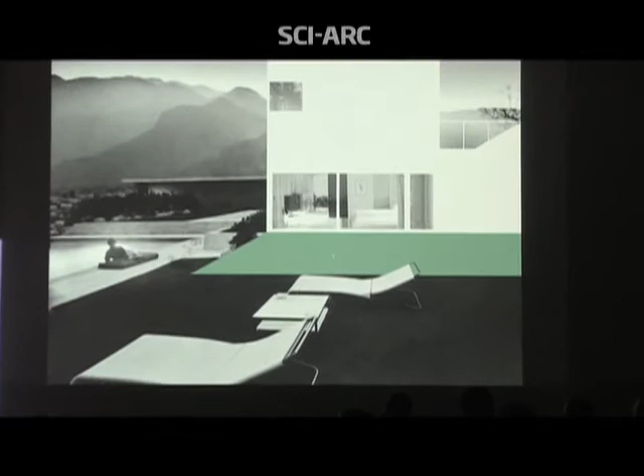One of the shared beliefs in our office is that architecture does boundaries best. Ten years ago, we were still at a moment where we believed in breaking boundaries. But the more we indulge ourselves in the discipline, we realize that architecture does limitations best. They do boundaries the best.

As a result, our projects could be seen as a collection that defines boundaries, composed of a series of objects. Not necessarily aloof, closed, or autonomous objects, but objects that eventually contribute to a city. In our mind, Los Angeles is very much a city of objects.

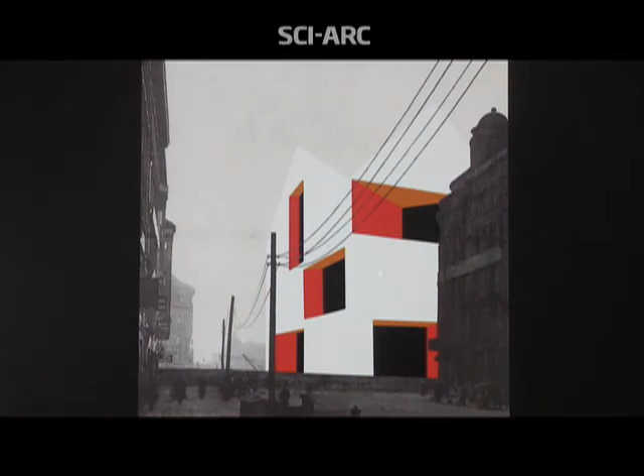So tonight we're going to talk about a collection of work, really as a city of objects, as Mark said. I think what unifies all of these projects of very diverse scales is a sense that in each one of these buildings there's always a sense of the multiple, or one thing on the verge of becoming something else. Whether it's an interior volume nested within something massive on the exterior, or where one building multiplies to become a double and the space between them is an active space of investigation for us, to the idea of the multiple where self-similar sized objects begin to multiply and approximate something altogether different in scale and function.

Finally, some of the larger scale projects we're working on today almost begin to approximate an urban scale and produce a kind of aura that is both diverse and, in that sense, urban, but also still maintains a sense of oneness and collective coherence. So tonight the lecture will be organized according to the following categories: singular objects, doubles, multiples, and what we're calling a new singularity, the larger scale, more urban projects.

So we will start off with these singular objects. I think for us, singular objects are objects that stand alone, but they straddle the line between being complex and being simplistic. They straddle the line of being an observer as well as being a participant.

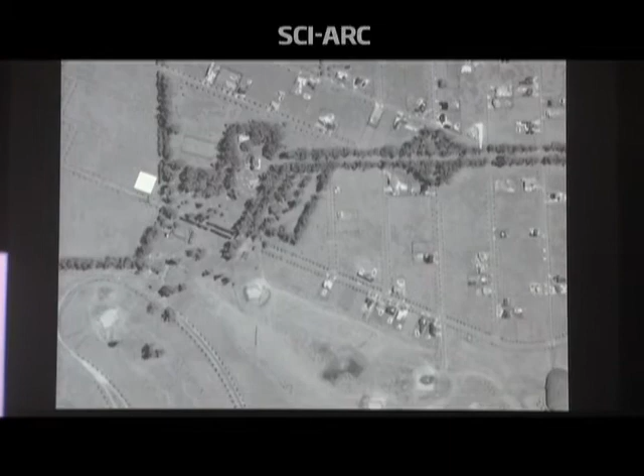The first project we'd like to show you is in the town of Rosario in Argentina, about 3 hours north of Buenos Aires, situated at the edge of a development. When we designed the project, there were really no buildings around, but we knew that in the future, 2 of the 4 sides would be occupied with buildings. So when we planned the building, we preemptively thought about where the future buildings would be, and began to figure out the circulation and the apertures of the building that would look through to where those future buildings would be.

So the house is organized around a spiral circulation, and every time one turns, one is exposed to a different frame of the landscape. It's the first time we built outside of the US, so we basically used a very simple geometry, a primitive that is a marriage between a rectangle and an ellipse.

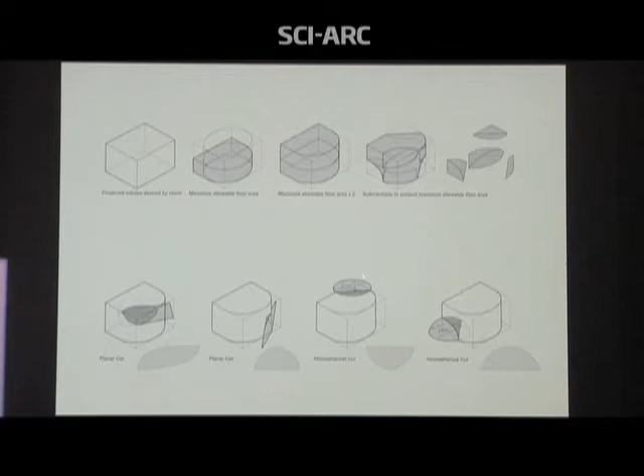Then we deploy 4 cuts for the desire to be an object sitting in the corner. 2 of the cuts are straight cuts on singular curved surfaces, and 2 of them are fragments of spheres. Our logic is that if they could build the concrete formwork of a sphere, they could easily build a fragment of a sphere. So these cuts are positioned at opposite edges of the volume, opposite corners of the volume, and they have a contingent relationship with the apertures. So the openings are really always next to one of these cuts.

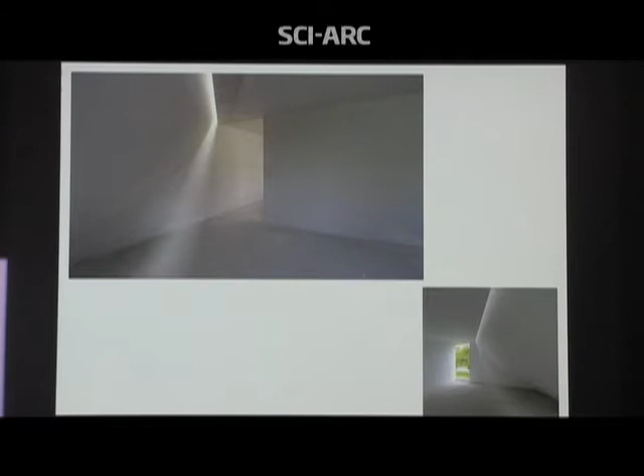And then there's secondary openings that bring natural light into the space, such as this one behind the spherical cut. One spirals up and exits into a semi-enclosed room before ascending into the roof garden. All the views one experienced in fragments are then exposed again, all as a panorama.

In contrast, the interior is much more open, with a double height space. As one walks through the house, one always experiences a cut, and then adjacent to one of the openings.

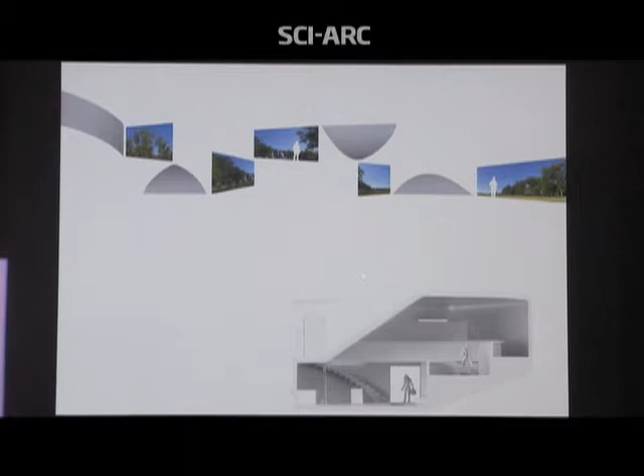Someone mentioned that this house is a love child between Mario Botta and a septic tank, which we're not sure if that's a good thing. I think it's a good compliment, yeah.

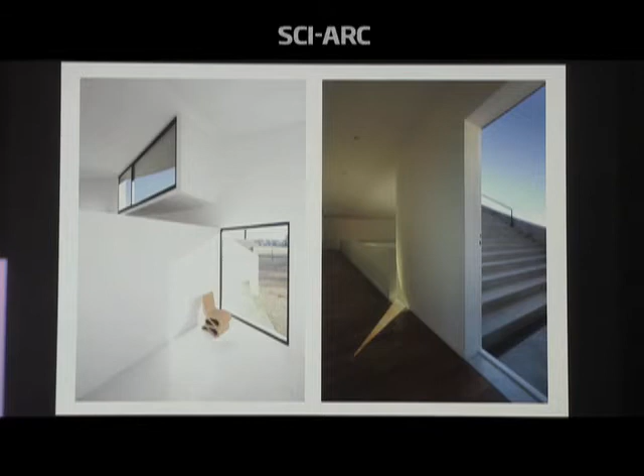And then at the end of this circle, one exits into this room, a room that is semi-enclosed, before ascending into the roof garden and seeing the panorama of the pampas again.

We think of the interior space contained by this brutal volume not necessarily as a resultant, but also as something three-dimensional, almost like a bubble that has its form shaped by the container, but at moments, like the corner window, begins to declare its own existence.

Another project in South America is in Chile, in the town of Penco. It's a pavilion, and the auspices of this project were that 10 architects were invited to design pavilions in commemoration of the second largest earthquake in Chile.

The goal is that the first five years of the existence of these pavilions will be used for services to the local town—if they need a schoolhouse, if they need a meeting room. Once the reconstruction effort is over, it would be converted into an exhibition space, and exhibitions would travel from one town to another throughout the Biobío region that has been devastated.

All the architects were given a very small lot, but nevertheless a beautiful lot. In our case, we are situated on a bluff on top of a cliff overlooking the bay, within a pine forest. One walks through the forest, and at the end you see this half-moon bay.

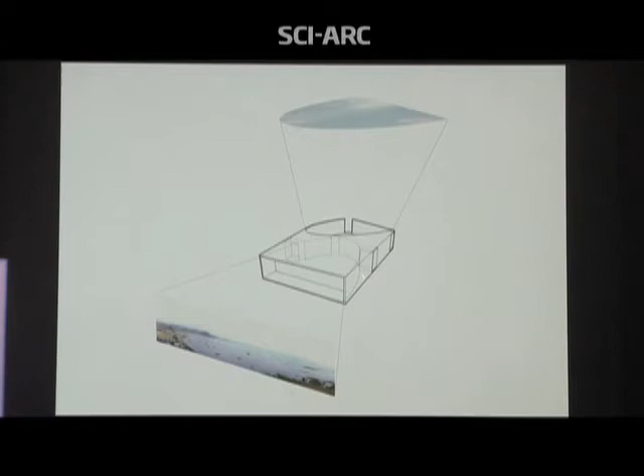So we decided that the size of this building needs to be virtually double, so we created an open courtyard—one will always walk into this empty courtyard as a preface before walking into the space again. The concept of the building is really two rooms, two half ellipses, almost exactly the same dimension. So when one walks through the forest, one walks into a courtyard first before entering the space.

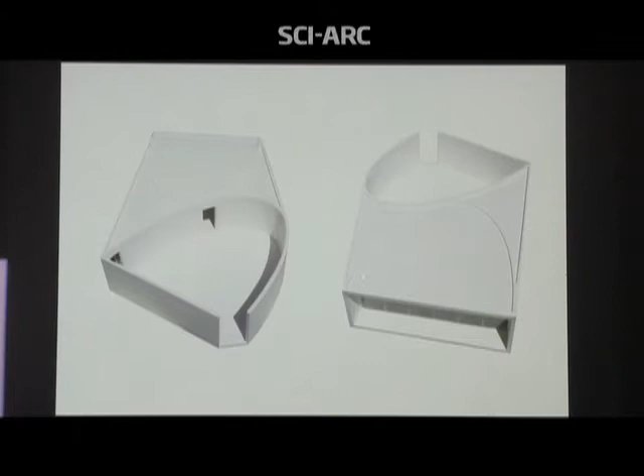So this is the model. Without the roof, you can see one major room, and we put all the ancillary programs, the bathrooms and such, on the edges. It's really a project driven by the plan—everything is extruded, and it's one story.

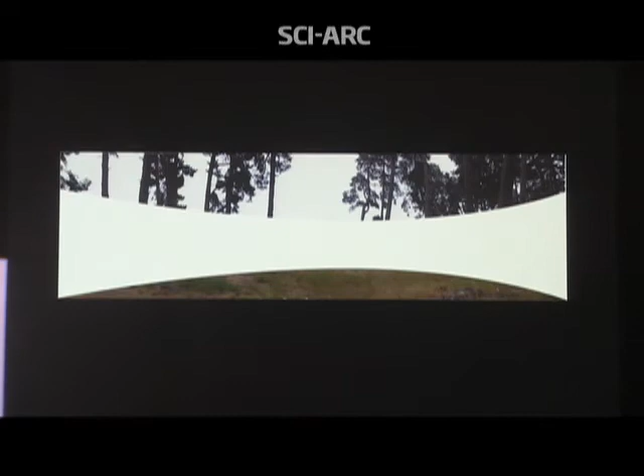We really see the courtyard as something just defined by the wall, so the ground is not even paved. But you always see the view of the next room you're entering into before you see the view.

We also propose to use the trunks of the pine trees as the formwork for the first courtyard, so as you walk through the forest, you have this rhythm or cadence from the size of these pine trees. You suddenly walk into this half-ellipse shape from the diagonal, with this very rough béton brut type of surface.

In contrast, the enclosed room is built out of almost mirrored polished concrete. So the two rooms are the exact same size, one being very rough and oriented towards the sky, and the other being very smooth and oriented towards the ocean.

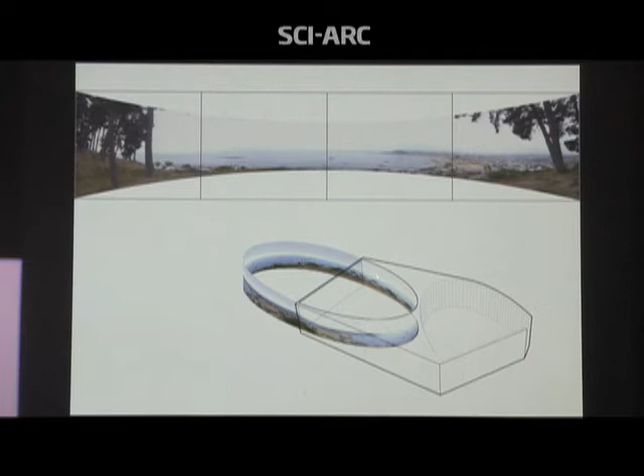In a way, our goal is that when you're in the space, captivated by the view itself, you're always conscious that you're in a half-ellipse room. It's almost a theater-like room where the horizon line continues through the space, behind you and around you.

This is a house that just finished a few months ago. It's situated in the town of Oxnard, between Los Angeles and Santa Barbara.

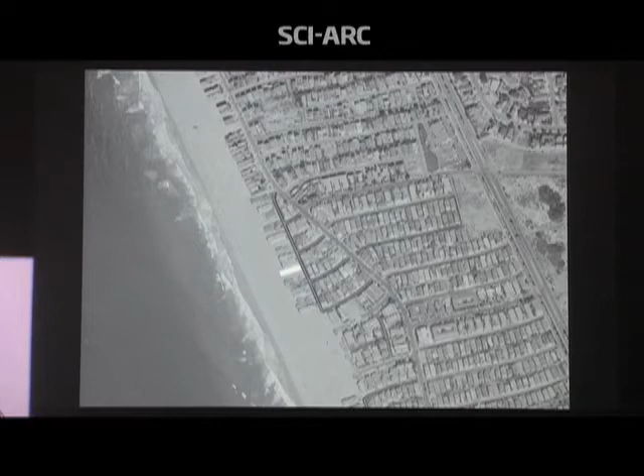Like many beachfront houses, the problem with these lots is they're very narrow and very deep. So oftentimes you have to enter quite unceremoniously through the alley into the house. Most of these houses plan to have their living rooms on the ground floor and their master bedroom above, which are great for those two rooms. But the rest of the house is dark and undesirable to be in.

So at the outset we wanted to create a large courtyard in the darkest part of the house to bring as much light in as the entry courtyard, so one has some spatial relief before you walk into the house. Then the second thing we wanted to do is bring as much view and light into the space as possible from the ocean side.

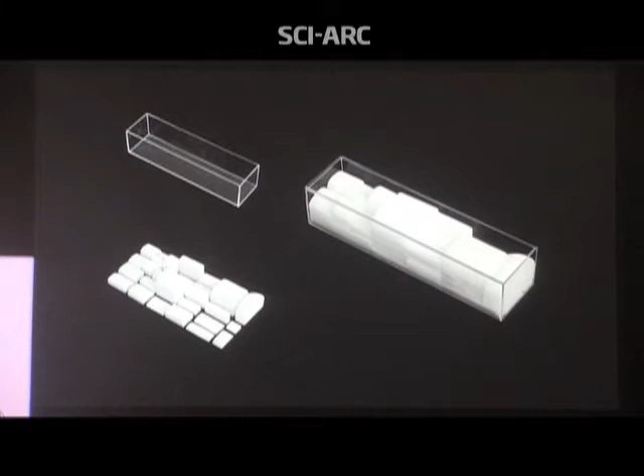So the concept is to give every room a shape, in this case a barrel vault, that faces the ocean. They're stacked together like sardines. They don't overlap, but they're all directed towards the ocean. So in a way, all the rooms have a defined space.

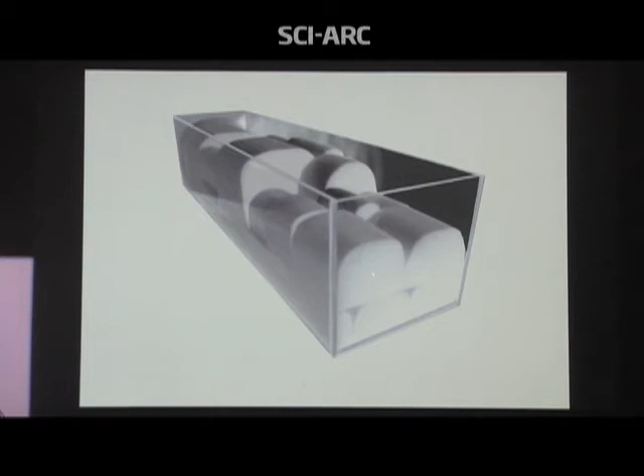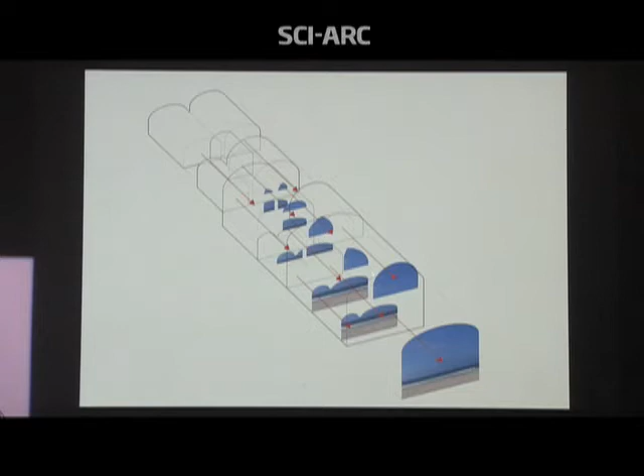But because of the orientation, even when you're two-thirds into the house, you always see the ocean or feel its orientation. If you cut a series of cross-sections, there's sometimes a double height space, sometimes a series of smaller spaces. But even when you're deep into the house, when the fragment of the view is very small, you feel this type of shotgun house relationship between one room and another.

Because the house is in a tsunami zone, part of the house had to be elevated in case a tsunami comes. So we use the same vaulting system to lift the part of the house that needs to be elevated. Then one looks from the beach side through this double height living space, through the master bedroom above, through the kitchen, dining room, and then into the courtyard and beyond.

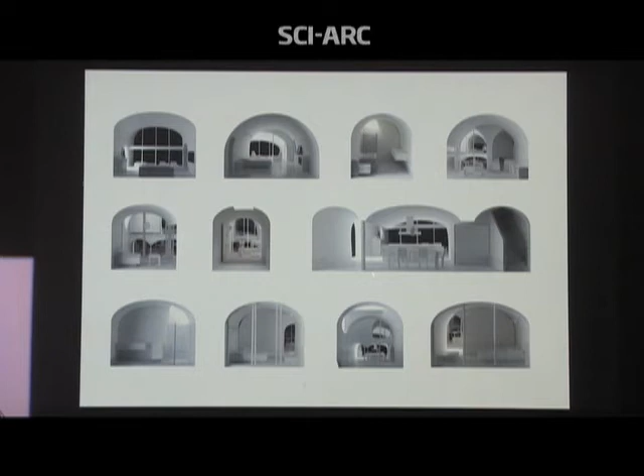Sometimes we have these happy accidents when one vault meets another vault. And then sometimes we have some unhappy ones like this, where some Gothic arches begin to appear.

The side facing the street is actually quite anonymous, almost like an Irving Gill or Adolf Loos house, which works quite well with the Spanish colonial houses around. We even use the vault, half vault, to carve the edge of the building to create more space, in contrast to the beach side, which is much more porous.

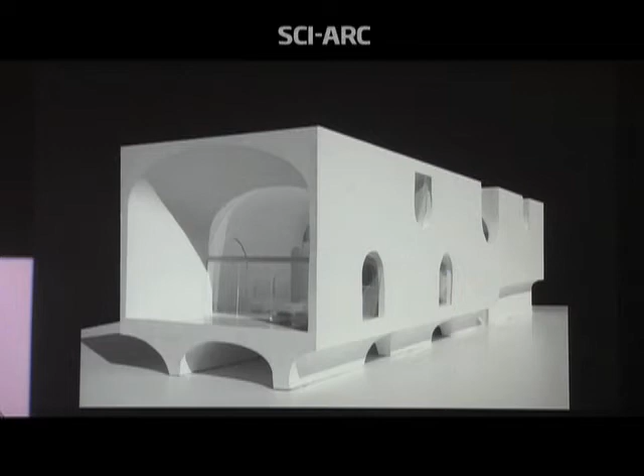So this was, I think, shot right after it was finished. The adjacent lot right in front of the house is not built yet, but we anticipate it would be. So all the openings, all the views, are really coming from the beach itself. The windows on the side are mainly for light.

We just have a very simple rule: all the windows on the side, on the ground floor, are vaults, and all the clerestory windows above are upside down vaults. So you don't have a groin vault like you'd have in Romanesque basilicas.

So one walks to the middle of the house, enters into the courtyard, and then from the courtyard one enters into the house through the kitchen, through the double height space, and then out onto the balcony and the beach.

This view, we are almost at the street, almost with our back to one room and then the street. But even here, you can see through the courtyard. We're at the intersection of two vaults, looking into the vault of the courtyard, and then into the master bedroom and through to the main living room.

I want to show three projects that we're working on quite quickly. This is a house in Matarraña in Spain, halfway between Valencia and Barcelona. It is a weekend house, 2,500 square feet, on a large plot of land, but it's situated in a grove of almond trees. Almond trees are very short, 2 meters high, but when they blossom all the flowers turn white.

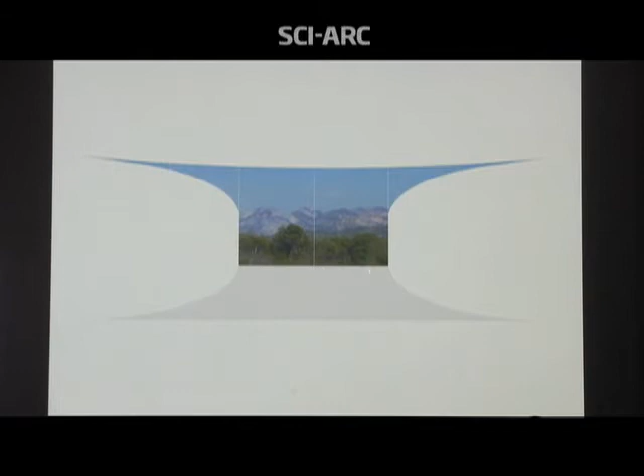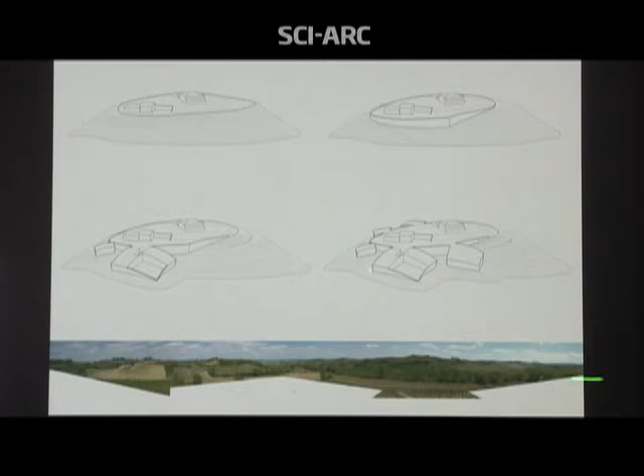I think this tension we first tried in the winery in Montepulciano in Tuscany, where there are some existing farmhouses, and we have to build a building, and we decide to half bury it so it doesn't interrupt this panoramic view. When it's half buried, with a subterranean gallery and future additions, we really think of the profile of the building.

Geometrically, it's very simple. The volume is really part of a larger sphere. We try to find different diagrams to approach a project. When we first designed the volume, maybe it's closer to Zaha's Cardiff Bay Opera House as a folded bar. But at one point during the design, another geometric diagram begins to take over, and this sphere becomes something that unites both the two main wings as well as the two wing walls.

The reason is we didn't want to recreate the view that you have above. We want to create a space that is open to the distance, but also have this nested quality, like at the Salk Institute. It's a room, but it's a very projected way of expansion.

So we think of the two curved walls that bend outwards, and we use the recycled water from the wine production as a reflecting pool coming all together at one point. So when one is above, you see this open landscape, and once you walk down, you see this type of nested room with the reflection of the sky. And then the exterior is clad with antiquarian brick. It was part of the code of the building in Tuscany.

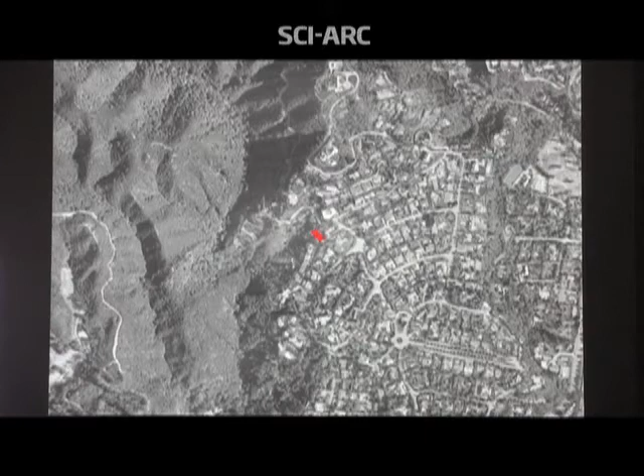I think this tension between larger moves or larger curvatures and smaller curvatures, we also tested in a house just completed up in Brentwood, situated at the edge, right below this little Charles Gwathmey house, on the edge of this valley that's slightly curved. So we took the curvature as the geometry of the house, and began to create a series of nesting rooms within the space.

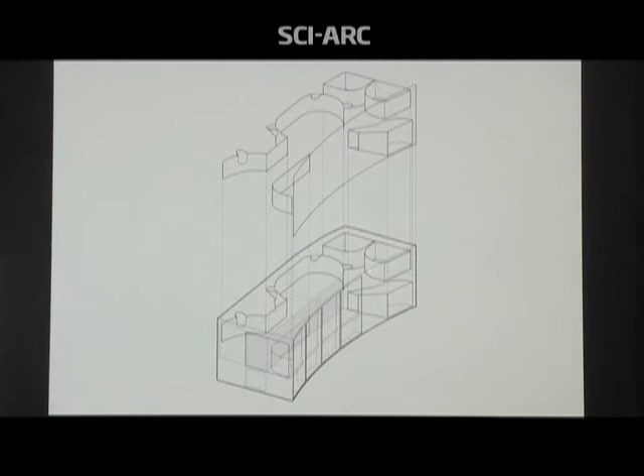So one enters in a perpendicular way to the house, and finds themselves in the center, like Frank Lloyd Wright, and then one turns, and then one sees the view again. So the very slight curvature of the house is in contrast to the flat glass that is right behind. When the glass is all open, there's a lining of this wall that creates a more intermediate space. And sometimes this lining continues and becomes apertures for skylights.

Sometimes the skylight cuts open in stairs. Sometimes the skylight filters through and becomes a clerestory window. And then one finds the curvature again in the rooms above, in the mezzanine.

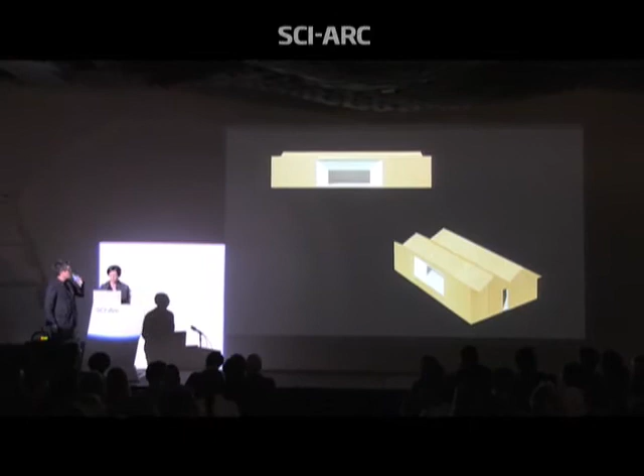So this is the category of the double, and the doubling has been present in our work since the earliest projects. It often comes about because of an existing circumstance, in this case, or because of a condition of the site, an extreme section. And I think it has been a tool for us to sort of absorb difference, but still find coherence in the overall figure of the building.

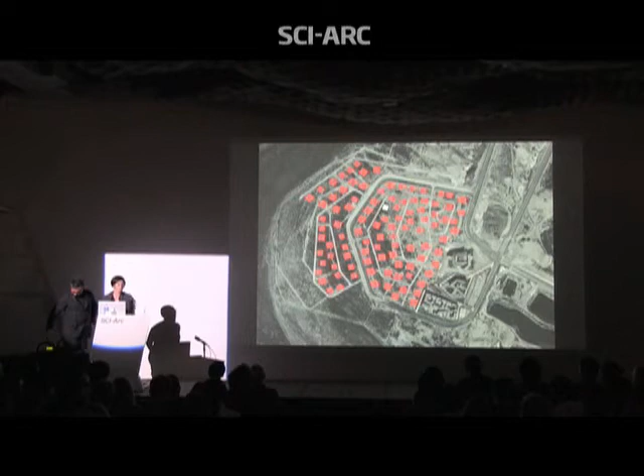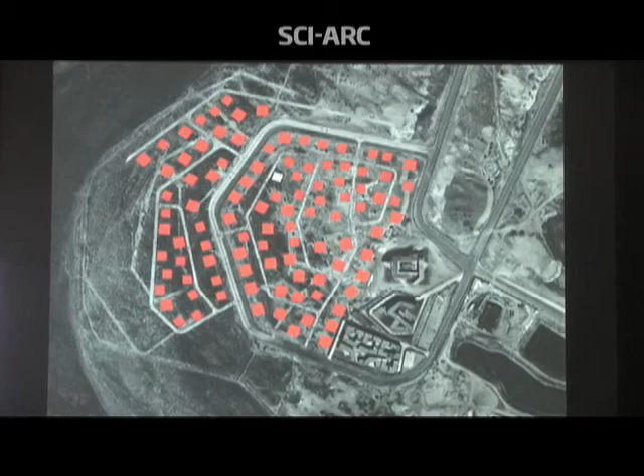So this first project is our contribution to the Ordos 100 project. There might be other people in the audience who were subjected like us to this social experiment on the part of Weiwei and Herzog and de Meuron. Mark got to skip the whole trip, but I had to go to the desert in Western China a couple times. This was—I had to go to Ordos. This is the result. It's maybe an architect's wonderland or an orgy gone bad, depending on your point of view. But in any case, this was our contribution, the red model.

In a way, we approached this project more as a kind of urban proposition than a single-family suburban project, and in that way tried to think about the most primitive idea of a house, and then imagine what it would mean to multiply that form to begin to engage an urban condition. In addition, we rotate the building on the site so that it somehow is approximating and grabbing a much larger scale of space through the corridors of view and the way that it's viewed always on the oblique. And so this doubleness—the project is called House House.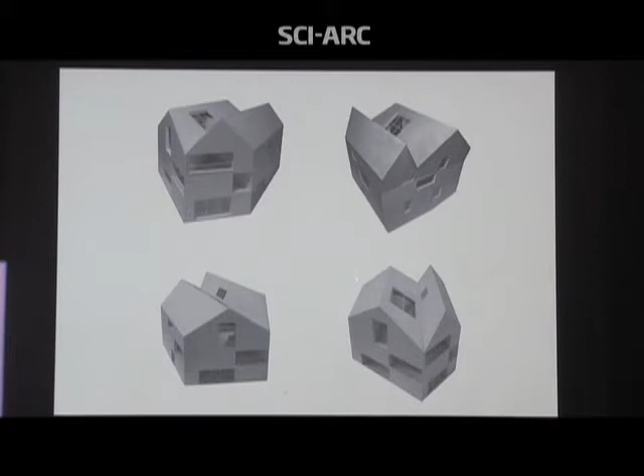What was important for us was that it always had this sense of doubleness in every view from every angle, but no two views were the same, so that you were always moving around it and perceiving it differently. It's a relatively large building by Chinese standards, 1,000 square meters, and the only parameter given by Weiwei and the client was that it would be in cast-in-place concrete and clad in brick. So part of our strategy of doubling was also thinking about structure and aperture. Oftentimes we look at ways to mitigate the mass of the building through the placement of the apertures, playing with flatness and depth, so the building feels both massive and sometimes quite flat and planar.

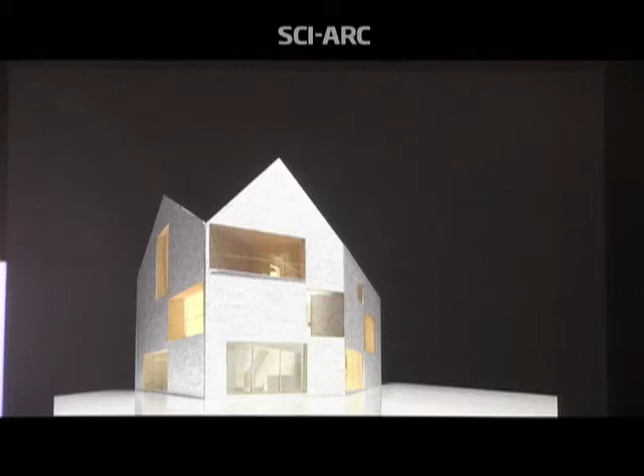The catalog of windows works towards that kind of diversity of program elements, and the way that the structure works, so that it has both a sense of flatness and depth, massiveness and planar flatness.

And in this aerial view, it captures the roof as a kind of fifth facade, where this light core, which is also sort of a solar chimney, reveals the hollow nature of the building, despite its size.

On the interior, the rooms are planned from very large double-height spaces in the public areas, up to the top of the building, where the master living areas have a very tight fit with the envelope of the house.

This project was just recently completed last October. It was our contribution to the Shanghai West Bund Architecture Biennale. This is our site, a little triangular site just south along the Bund, south of the center of Shanghai. It's part of, in a way not dissimilar to some of the efforts for the Chile project, a government plan to redevelop this whole area for housing, and the first elements of that redevelopment are a number of cultural buildings.

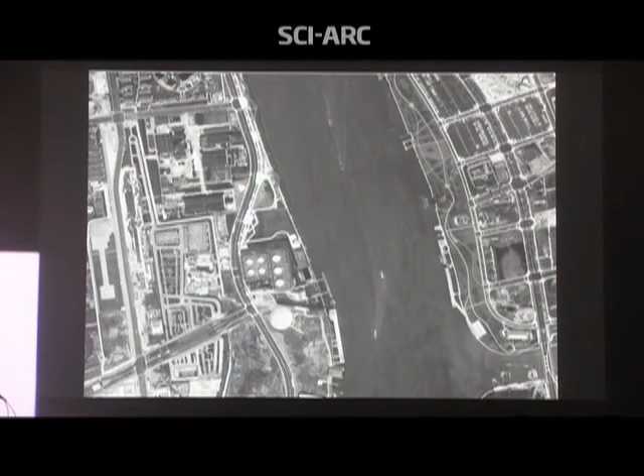So we were one of the few that built our pavilion in phase one. Bow Wow from Japan is developing a pavilion, Yung Ho Chang is building a pavilion, and here, for example, this will be a new museum by David Chipperfield. So it's sort of a no man's land.

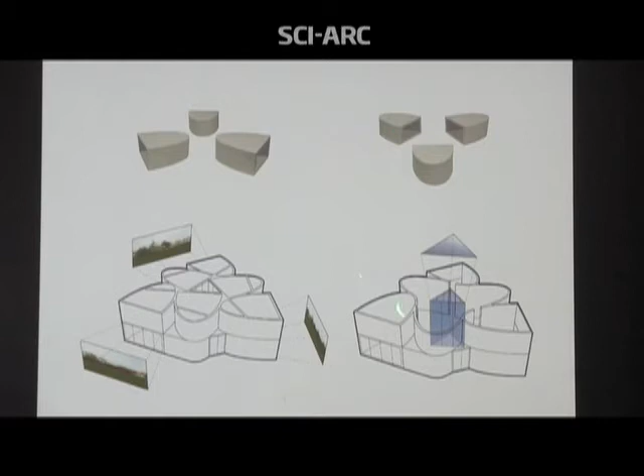And in that way, the building needs to accommodate many programs over a long period of time. So our approach was to make a pairing of two different kinds of volumes, smaller volumes. It's called the Pavilion with Six Views. Three of them are oriented outwards, and the other three oriented inwards towards a central open-air courtyard.

From the exterior, it has a sort of loose fit, a slightly ambling quality as a mass. Zooming out, it also acknowledges the scale, the sort of erasing scale of the industrial past of this landscape, and some of the smaller scale pavilions that served as construction buildings.

So this pairing of inward and outward volumes - first this is the exterior view of one of those rooms that has a very immediate connection to the street and the plaza, in contrast to this kind of pinch where you enter.

And then in the interior, these rooms always have this kind of panoramic view coupled with a skylight at the other end. So this play of light and shadow is quite dynamic despite the self-similarity of all the rooms - they're always changing in atmosphere.

In contrast to the inwardly facing rooms, which are oriented towards this atrium courtyard and have a near sense of continuity, just pinched by these moments where they intersect the outwardly oriented volumes. So in plan, it can feel both a series of discrete objects, but also there's a sense of continuity in the path of space between the three interior volumes.

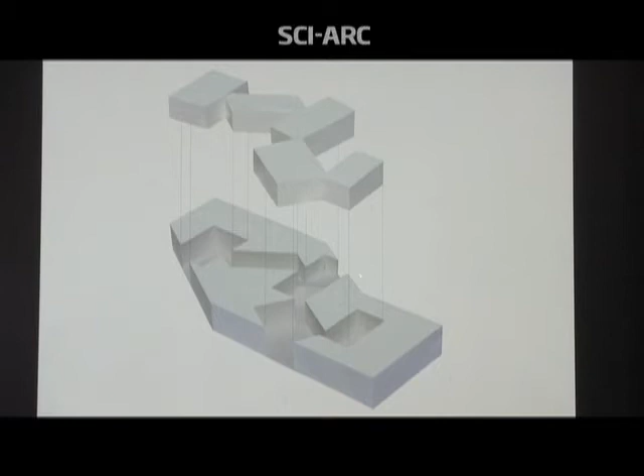So the idea for the project was to maximize the perimeter, make the biggest building we could, and then begin to carve out the network of paths for public circulation. The goal was to maintain as much of the perimeter as we could so that we could maximize that view, and then create this kind of networked series of courtyards.

So in a way it's a kind of inside-out house, where the perimeter is quite continuous, and then the views within and out of the block of the building are quite discrete.

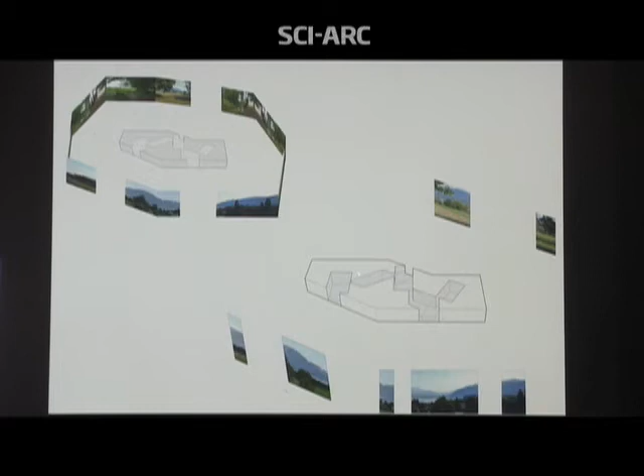The logic of linking the courtyards was really to minimize these points of connection, so that these became discrete and autonomous spaces, maintaining a kind of definition as a space, and so that the public nature of moving through them had a procession that was, in a way, quite urban. And then in the same way, the way they met the edge maintained that sort of minimal interruption.

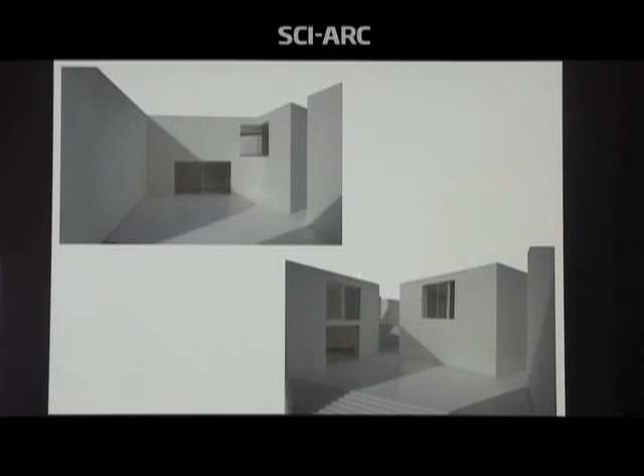We minimize the apertures in these courtyards simply for access into the buildings, except in moments where there was continuity of public program from the perimeter into the inner block. So this diagonal view always drew you through the building, and you began to perceive the inner block as a series of pieces and not one singular block. On the perimeter, that continuity of the facade is maintained despite the sectional change.

So the next category is the multiples. What's been interesting for us, as the scale of some of our projects has started to grow, is how we can use this repetition of self-similar objects to begin to approximate something often much larger or very different in function. What results are, for us, quite interesting inventions of structure, hybrid types of spaces. And then when we began to think about larger scale buildings, how we can take this bottom-up approach of aggregation to describe a much bigger building through a set of discrete and more local circumstances.

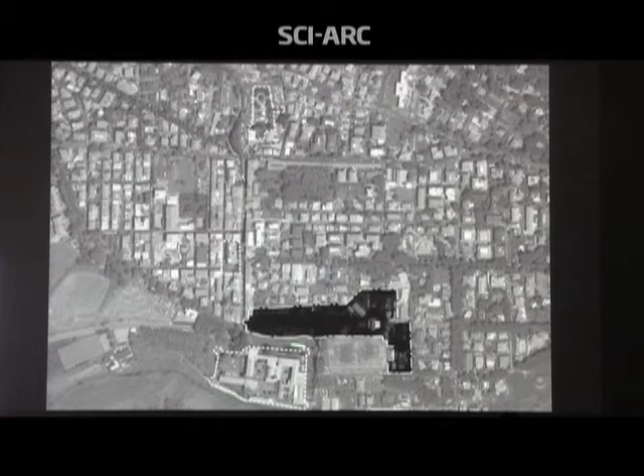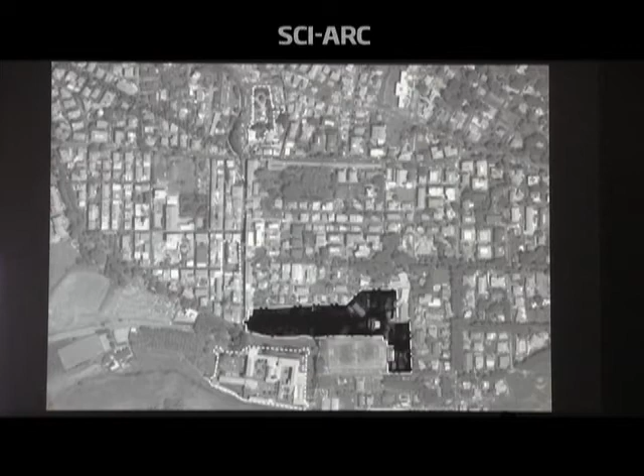This is a project we've been working on for quite a long time, for the same client we're doing the winery for. It's in Grottaferrata, a suburb of Rome, a historic town. This is the main Corso del Popolo, and this is an important abbey, the paper restoration abbey where the Da Vinci Codex was restored. That proximity is important, and there's this kind of strange no man's land of property that's been in arrested development for quite a long time. There's a diverse group of buildings: historic buildings, a 19th century villa, strange half-abandoned hotels and office buildings, housing that was left to decay, and then this park.

This park will be deeded back to the city as a public arts park. Given that diversity of buildings, vintages, and programs, the project will be a kind of mixed-use arts campus, with galleries, spaces for artists to work, a creative office building, retail, and some housing. Our approach was to look for a uniform set of building blocks, very elemental pieces we could aggregate in different ways to respond to these different conditions and programs. So as a simple diagram: this is the museum, gallery, housing, flexible exhibition space, creative office building, and then art exhibition spaces in the park.

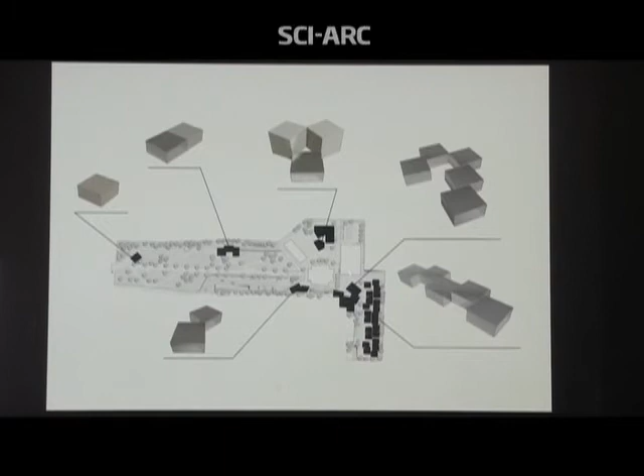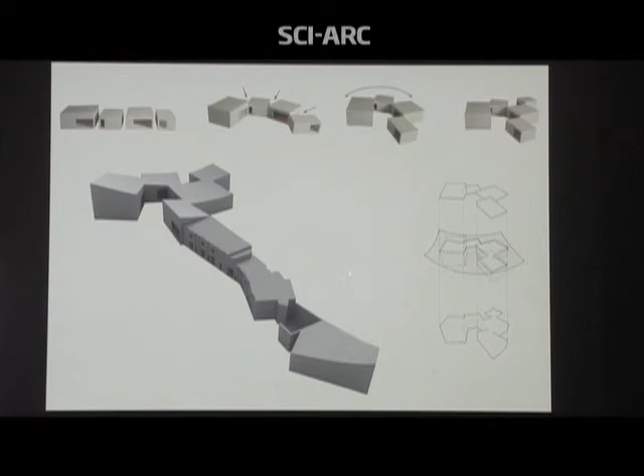This is just a quick study of the museum building. It's immediately adjacent to these medieval carriage houses, which form a really interesting scale, almost like a medieval street next to the villa. Our approach here was to continue that scale of the street and form a plaza courtyard through the aggregation of five volumes, and find a way that the program could be five different spaces or one continuous exhibition space. The strategy to unify the five volumes was through this continuous cut of the roof, so it has a clarity that allows for diversity of function and division of space beneath.

This is the creative office building, now a very different site circumstance, surrounded by three large blocks, so it's really a building in the round. Our approach was to aggregate, almost creating a ring structure, then stack the volumes and rotate them, so there's no real front to this building, but it somehow engages all of the surrounding circumstances in quite a steep sectional change through this simple logic of aggregating around a central void.

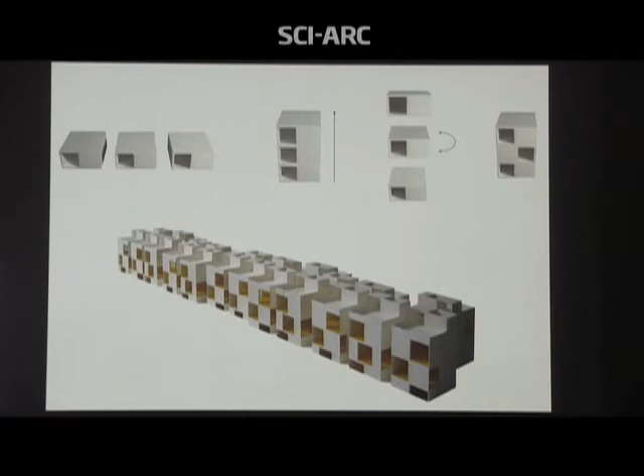And then finally, the housing. This is a portion of the project we collaborated on with the Swiss architects HHF, and in this case we had a really tight footprint to get a lot of housing units on. So we proposed to stack the units like little mini towers, and the plan is to use the rooftops as the entry, displacing the private garden, which is typical in this region, to the roof, affording great views back to Rome. Then you descend into the unit to the more private spaces below, so we maintain the autonomy of the ground as a public space.

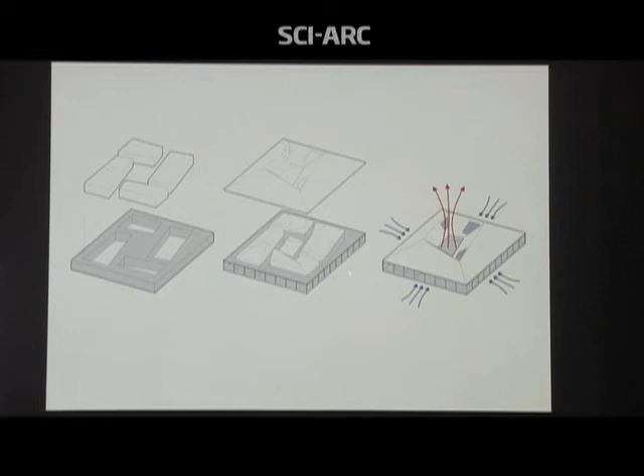This is a single-family house in Kauai, on the north shore—really one of the wettest places in the world. Our client's program was simply: I want 4 different living spaces, 4 houses under one roof. So it's really a 50-50 planning where the gray stuff is unconditioned and the white volumes are the conditioned space, all unified under one roof.

The only restriction in this region of Kauai is you're given a very sketchy black and white Xerox of what's called a Hawaiian style roof, and somehow you have to engage that as the zoning parameter. So of course we made it 3 times bigger than typical, got rid of all the extraneous details, and cut a big hole in the middle.

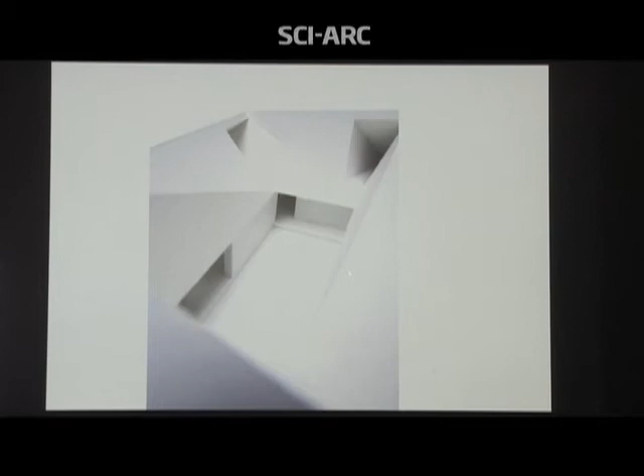This is basically a 6,000, about 6,500 square foot footprint with a courtyard. These apertures within the courtyard are skylights that bring light into the deepest portions of the house. And in the way the cut is oblique to the perimeter of the house, the roof dips and swells according to the needs of light and program.

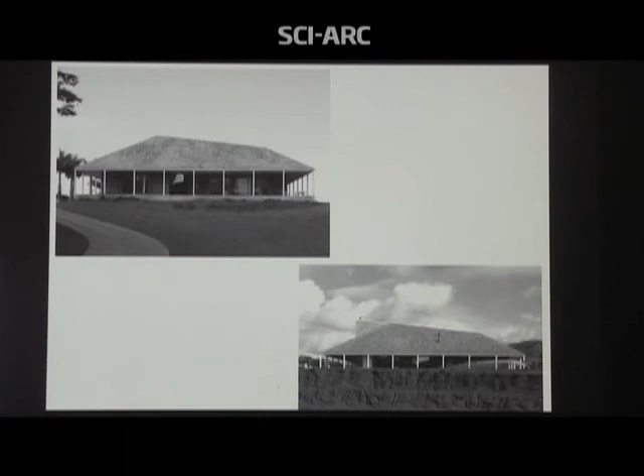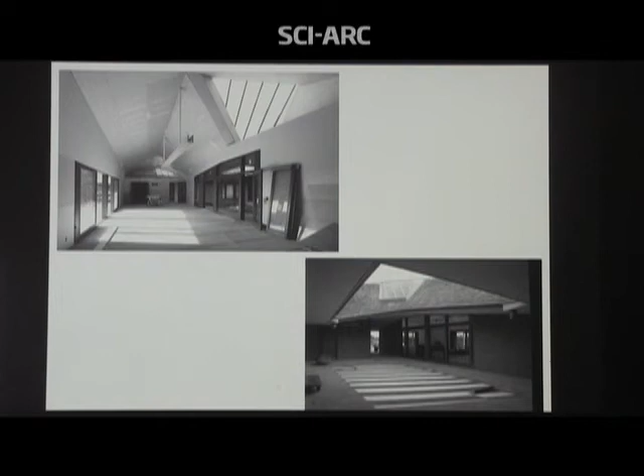In certain views it almost feels like it's splitting into two, but it's unified by this lanai space which wraps the entire building. At other views it feels quite precariously placed upon that base. In contrast, the interior of the house is quite volumetric, filling the entire 20-foot high interior ceiling height with light, while the courtyard is a compressed space that opens to the sky.

I think this is a good segue into something we've been preoccupied with for a long time, which is the Hawaiian-style roof—well, just the roof. I think at one point when a building approaches a certain scale, strategies of doubling and aggregation aren't sufficient to form a larger whole. We're very aware of this—for lack of a better word—a Mario Botta problem, that certain types and forms work at a certain scale, don't work at a medium scale, and then when it becomes a teapot, it works again.

So this intermediary scale—the roof becomes something for us to unify more disparate aggregations. This happened in a series of earlier competitions and house renovations—the whole idea of roof as a primitive hut, or roof as something that unifies. But in the early project, there's a certain detachment of the roof, maybe closer to Yona Friedman or Constant, almost as if the ground is allergic—we're allergic to the ground.

I think in the last 2 projects we'd like to show, we begin to look at the roof again, at the ceiling as a way of organizing space underneath, but with more engagement with what's happening below.

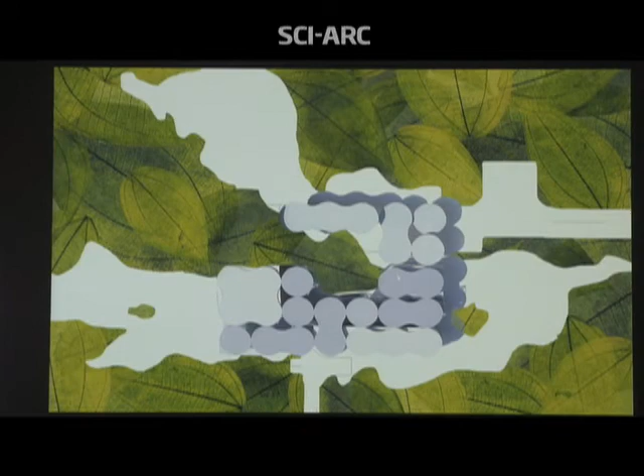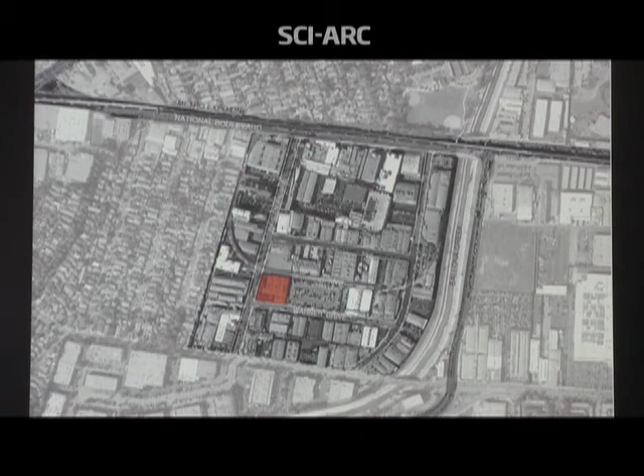This is a project in the early stages we're working on for the UCLA Graduate Art Studios building, in the Hayden Tract in Culver City. It's on a corner, a kind of messy parcel with one really nice old 20s wallpaper factory building and this sort of aggregation of appendages over time.

Our approach was really direct. We eliminated all of this extra stuff. We extend a continuous ground at the level of 3 feet above grade, the existing condition of the warehouse. We reclaim the entire block with a new facade, and then extend the logic of the historic bow truss roof as a roof plane that frames the entire site, creating this kind of pure envelope of space.

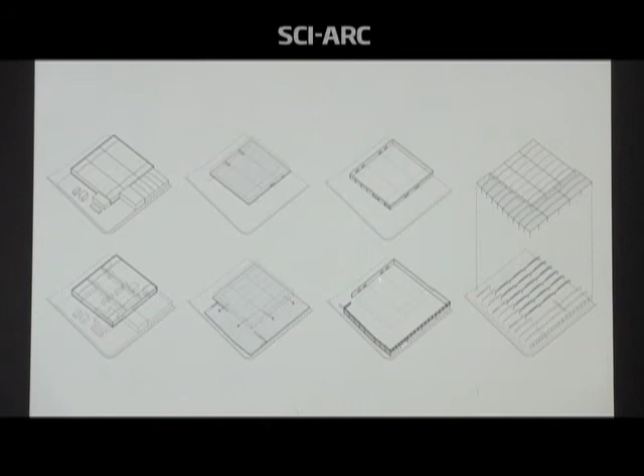As a diagram, this is the historic bow truss building that we extend and then develop a logic of interior and exterior spaces underneath, wrapped by a kind of solar umbrella-like roof that creates an unconditioned but covered space surrounding the edge, the street edge of the building.

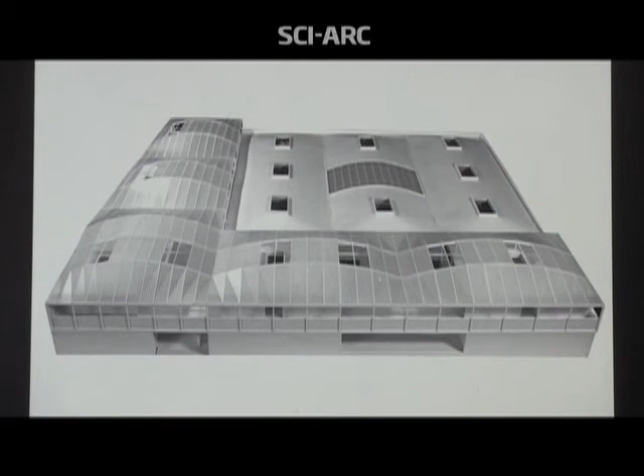So I think, as Mark said, if early on in our career the roof became a sort of hovering abstract mediator of atmosphere and light, here in these last 2 projects we're beginning to look at ways to really engage the logic and the tectonics of the roof as part of the space, and more direct engagement with the architecture.

So this is the entry to the building from the spur. It's one of the sort of leftover circulation spaces in the planning of that area. In terms of planning, the idea is that there are a number of artist studios for the students, and then the addition of labs, classrooms, galleries that are more collective spaces.

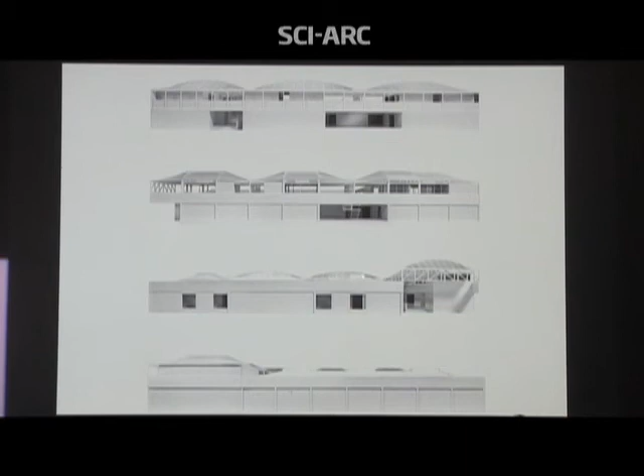The result is that on the south and west facades, the building is much more porous and open to the street, in contrast to the other elevations, which are more connected to adjacent buildings. The building engages this vernacular, industrial, very generic building logic, but begins to look at the assembly of the roof and the way that the space of the roof structure can begin to define a program space in the building.

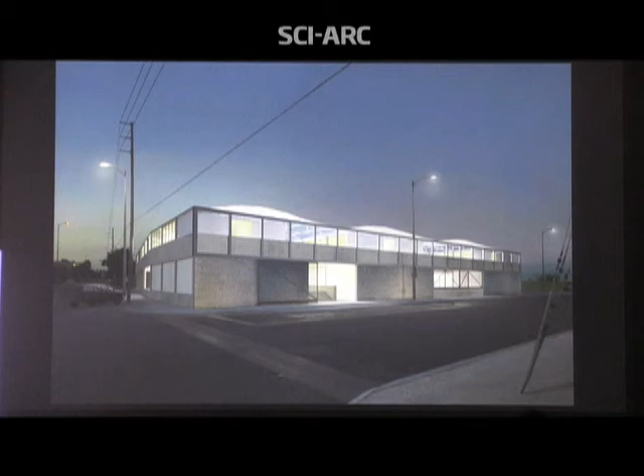So conceiving of the entire building precinct as a kind of mini city, it's anchored by a number of key infrastructure elements. The street arcade connects the street to the student parking, what's called Center Bay. This is the existing warehouse, reconfigured as a kind of village of studios where the primary studios are. And then a series of workshop buildings so that the yards become another one of those collective spaces between the city outside and the inner life.

And then a garden, which is a kind of active place for the students to produce work, talk about work, as a kind of flexible space.

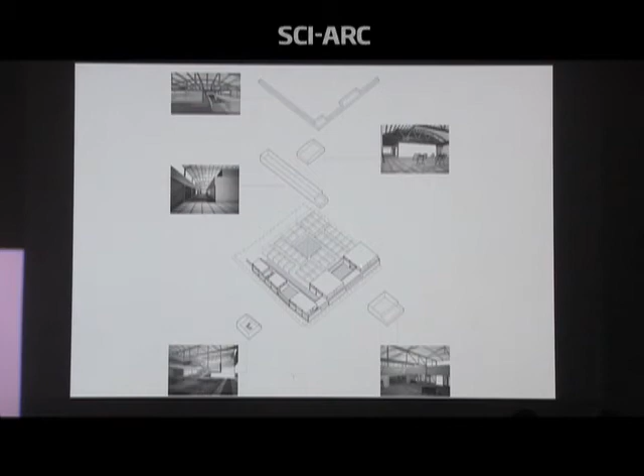We've always been fascinated by this logic of the warehouse, the big hall, and this image of Mies has been dear to us for a long time, but we got fascinated when we were thinking about this infrastructure and space planning, and wanted to look at what was behind what was masked out in the case of Mies. We began to think not so much about framing a space by inserting planes, but actually creating apertures into this extended landscape and how we can engage that through the making of rooms and openings to the larger scale envelope of the roof plane.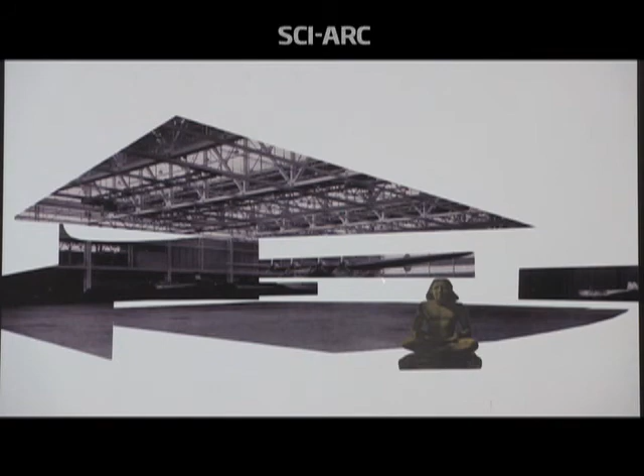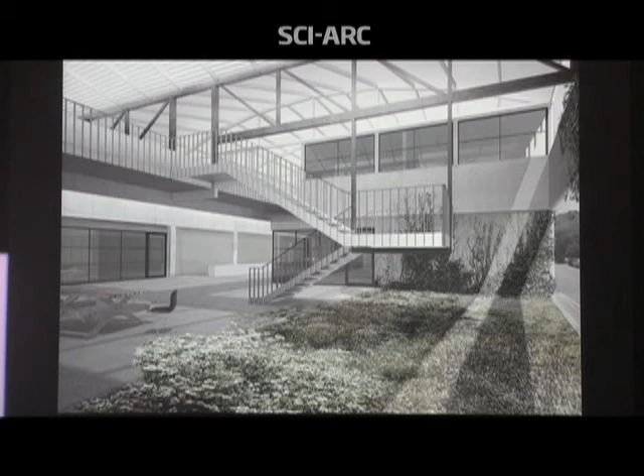So just a few images to walk you through the building. This is the entry into the covered but unconditioned arcade. The garden, this flexible space where the roof's stair is hung from the truss, and so this whole upper open mezzanine level threads through the reconfiguration of the truss as a kind of barrel vault in the areas where you circulate.

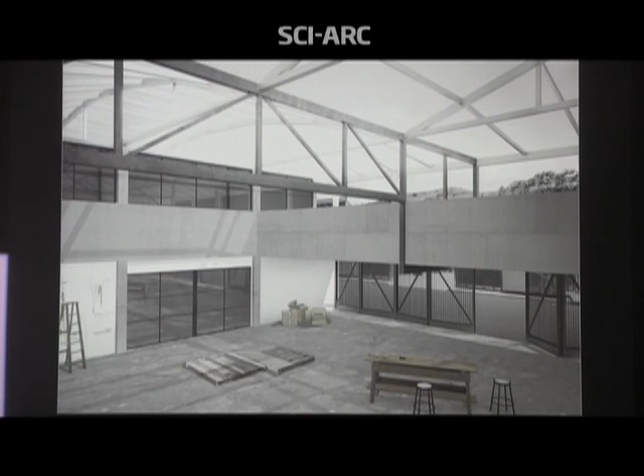This is the Center Bay, the space in the historic building where this village-like arrangement of the studios gives this near definition of a plaza, but it really celebrates the reconditioned existing truss. This is the workshop next to the metal lab, where once again the conditioned or unconditioned but covered space creates an interesting atmospheric zone between the interior space of the studios and the street.

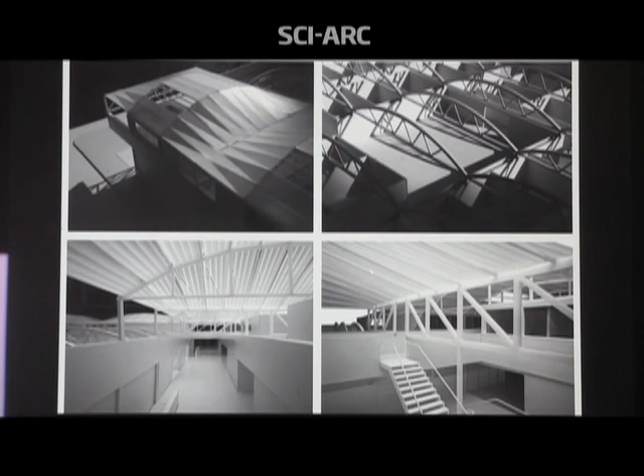So we're hoping that in the end this building will be generic but cool enough that Ed Ruscha might think of it as a new icon in LA. So this is the last project.

This is a project that's pretty active in our office right now. It's a competition we won about a year and a half ago for what's called the Menil Drawing Institute. It's on the campus in Houston, and just a little bit of orientation.

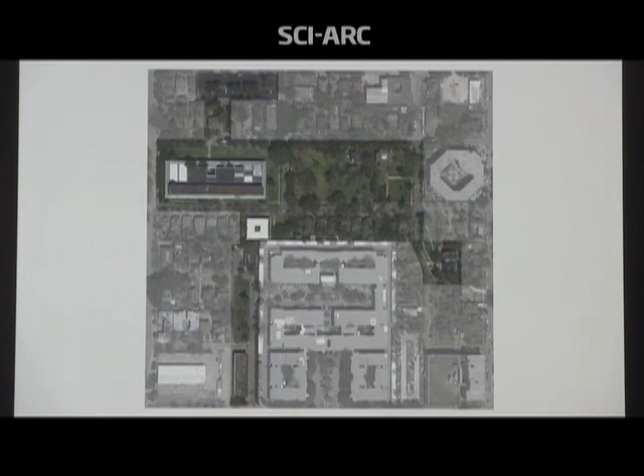This is the Menil Collection building, the Renzo Piano building that was completed about 25 years ago. This is the Rothko Chapel, Philip Johnson, the Byzantine Chapel, Francois de Menil. This is the Twombly Gallery, also by Renzo, and then this is called Richmond Hall, which is a generic building that was reconfigured by Dan Flavin. So those are the primary art buildings on the campus, and for those of you that haven't been there, it's really a building or a campus.

It's a residential campus defined by this great mothership, the Menil building, and then these pavilions, which are distributed throughout the campus. And I think what defines this collection of museum spaces is really the use of natural light, and more specifically the way that light comes in from above. So from the invention of Renzo, the ferro-cement concrete leaves, to Richmond Hall, all of these buildings modulate light in different ways, but light from above is really what defines the experience of art at the Menil.

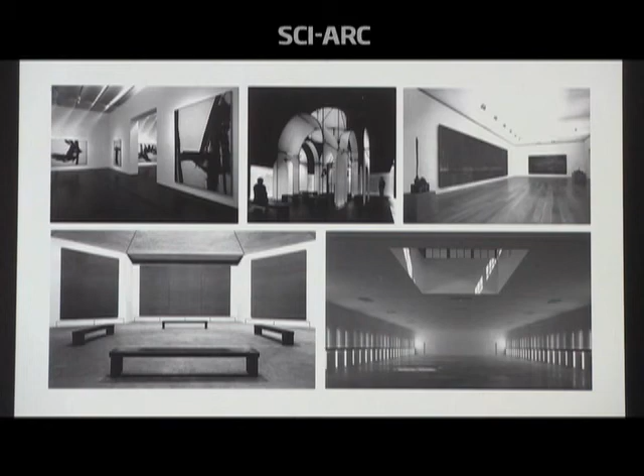Making up the fabric of the campus, and really what makes it special and completely unpretentious and almost magical, is this landscape of bungalows that Dominique and John really wanted to celebrate and maintain when developing the campus. So they're all painted a uniform coat of gray, and in addition to these buildings is a great fabric of existing primarily oak trees that are not only beautiful but provide really important shade and atmosphere throughout the campus.

This is the existing condition. Our new building is essentially right here, which is about the geographic center of the campus. There's a master plan that was completed by David Chipperfield a couple of years ago, which plans the entire redevelopment of the campus, and the Drawing Institute is the first building in that redevelopment plan.

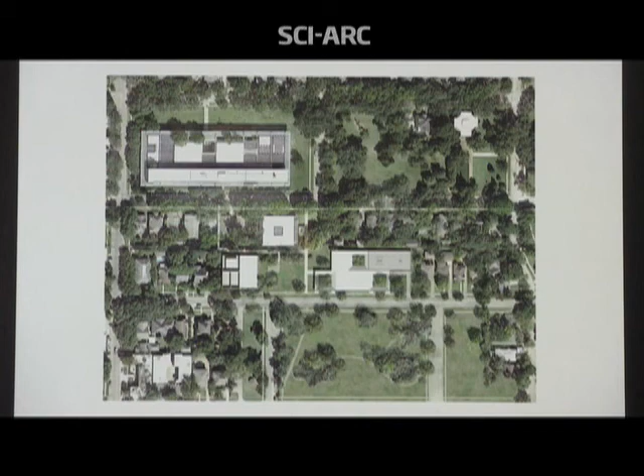The first thing we needed to do is tear down part of the housing, continue the street, a network of pedestrian paths, and a new landscape designed by Michael Van Valkenburgh. Then the new Drawing Institute, and also a new energy house, with demolition of the rest of the building. Right now, all the main entry is from the north, from the parking lot, but Richmond Avenue is being redeveloped, and we foresee that there are a lot more people coming in from the south, past Dan Flavin, and this would be a new entry to the Menil campus.

When Dominique de Menil commissioned Piano, she asked for a building that looks small on the outside but big on the inside. I think, on the contrary, for our Drawing Institute, when we did the competition, we stretched beyond the given parameters. We really think this building needs to be big on the outside and small on the inside, for reasons of scale, for how the building faces a larger park, and how it works together with the energy house we're designing in concert with Twombly to form a new intermediary scale space.

Furthermore, the works on paper are sensitive to light, but they're also small in scale. There's a certain degree of immediacy to the work. I don't know if anyone has seen the Paul Klee Zentrum in Bern — very small scale drawings that are better in domestic sized galleries, but put in a huge warehouse. Sometimes we think the contrast works, but sometimes not. So with the collection full of surrealist drawings and post-war American paintings and drawings, we really designed a space that fits a specific collection with space to grow.

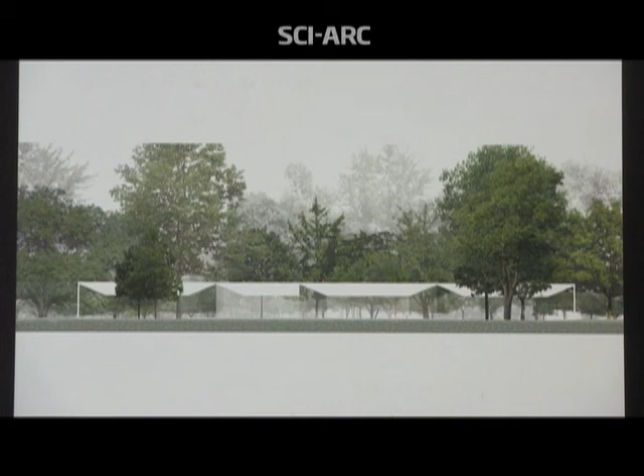The concept really is to create a very thin sheet of paper that stretches beyond the site and embraces the existing trees, meandering around them. Underneath this thin sheet, a steel roof, are three volumes: exhibition, administration, and study, unified by a roof, with three courtyards.

The two courtyards, the east and west courtyards, are entry courtyards. One always enters into these courtyards before entering into the building. We see these courtyards as both belonging to the park as well as the museum. So for us, it's an in-between space.

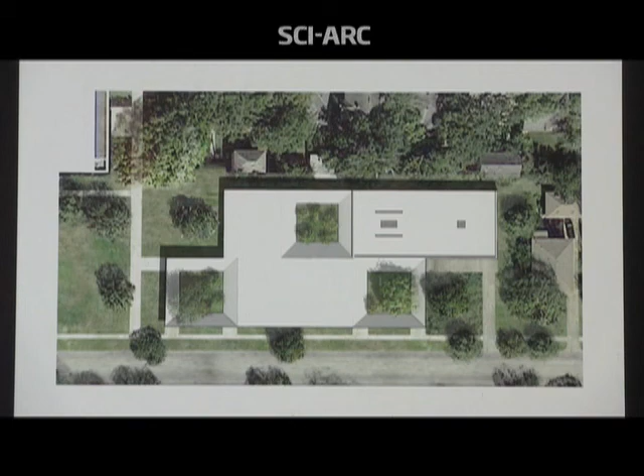It becomes a space that is shaded by the canopy of the trees, and partially defined by the porch of this courtyard. So in a way, one is adjusted to the light level from the harsh sun of the exterior to the courtyard before entering into the building. It becomes a crossing point of many different pathways, whether one is entering from the Byzantine to your right, coming from the south, or coming from the north above.

As Mark mentioned, the issue of light is really critical. Just as a kind of metric, the typical Texas sun is about 10,000 foot candles, and the ideal environment to view drawings is 5. So how do we get through that gradient within the footprint of a really small building?

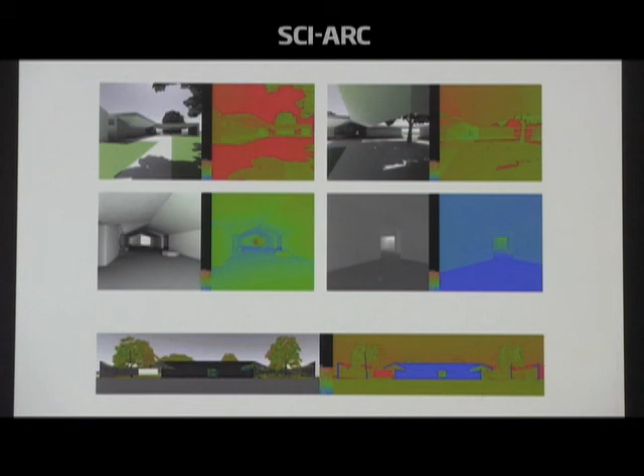These are some of the early studies where red is hot, a lot of sun, and blue is less sun. Both the trees and the way the courtyards and roof canopies work all start that step-down before you get into the gallery. The typical situation is a sort of matinee effect where you get into a drawing gallery and feel disoriented, like you can't see because it feels really dark, when actually it's quite a generous lighting condition.

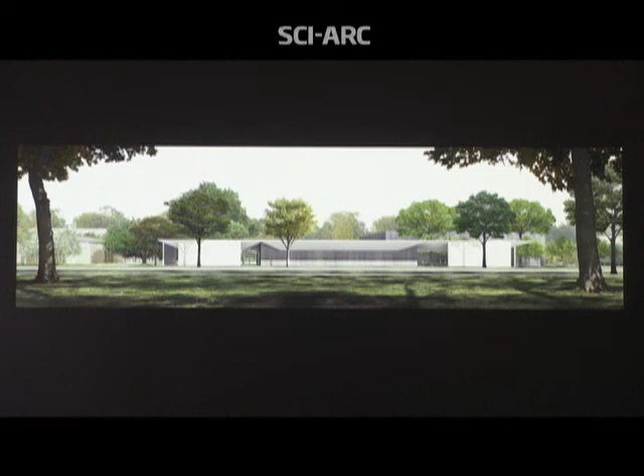We've been developing this roof structure together with Guy Nordenson, who I believe was here last year. If all the precedent buildings at the Menil campus are about light from above, in our case, light from above is essentially not an option. So this idea of draping the roof, over the landscape, became a challenge of how we could create this extended roof plane that was as thin as possible.

This is a view of the Drawing Institute from the south that shows this attenuated roof, which is 8 inches thick, with cantilevers sometimes of 60 feet. So from the south, the building feels quite mute and quiet, and really forms just a porch to the garden to the south.

Alternatively, coming from the north, so Twombly would be essentially right here to your right. The courtyard, almost like a catcher's mitt, really grabs you visually and forms an entry as a garden room before moving into the interior of the building.

This is a view approaching from the south corner, so one finds itself in this diagonal view in relationship to the entry of the space. You see this cantilevered roof, that porch that cantilevers downwards.

I think the issue with the roofs is that they work in conjunction with the tree canopies, so that qualities of light and projected shadow are a critical part of that atmosphere that is a prelude to getting into the building.

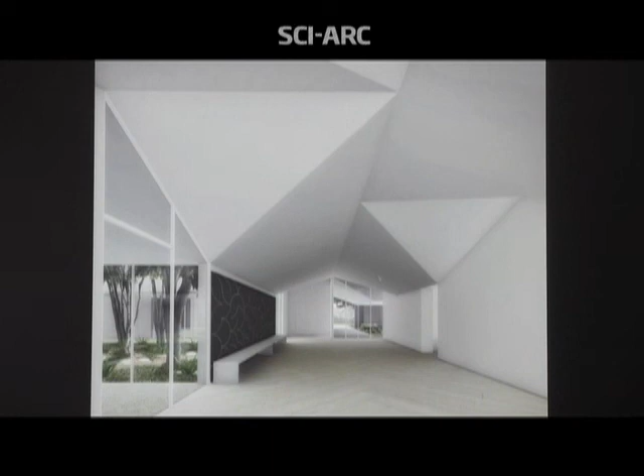And then from the east and the north, one enters into this living room, which was not called for in the original program, but we grouped all the circulation area into a non-functioning space. We see this more than a foyer, but really like a multi-purpose room like in the Shaker houses, where they could have large meetings, politically activist events that Menil has been famous for in its history, or possibility for curation or co-curation for curators to use for spaces next to the gallery that could accommodate pieces that are less light sensitive.

But in this living room, which is the heart of the building, one is always visually connected to the courtyard. So in a way, we follow the lineage of Philip Johnson's first house for the de Menils. They eventually became the DNA for Piano's building.

And then from there, parallel to that is the gallery space, which is one large span but could be subdivided into smaller rooms. Adjacent to the living room on the other side is a scholar courtyard that's only accessible for the scholars and curators.

I think this space, like some of the living room and other spaces in the building, is always about buffers. This is an important space between the public life of the administrative part of the building and the study room, which is really the inner sanctum of the building.

And so light and landscape work together to create that more intimate scale as a transition between the inner life of the building and the drawing room.

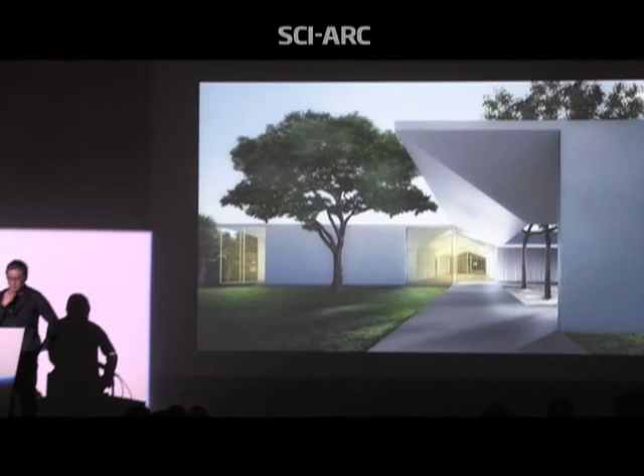This whole notion of being in the middle has been something we have embraced throughout our whole practice. For us, being in the middle is not a static state, not a common denominator on average between differences, but it's really a dynamic state of oscillation between extremes. We find being in the middle is constantly oscillating, and this is a state we try to find in our work and maintain in our design.